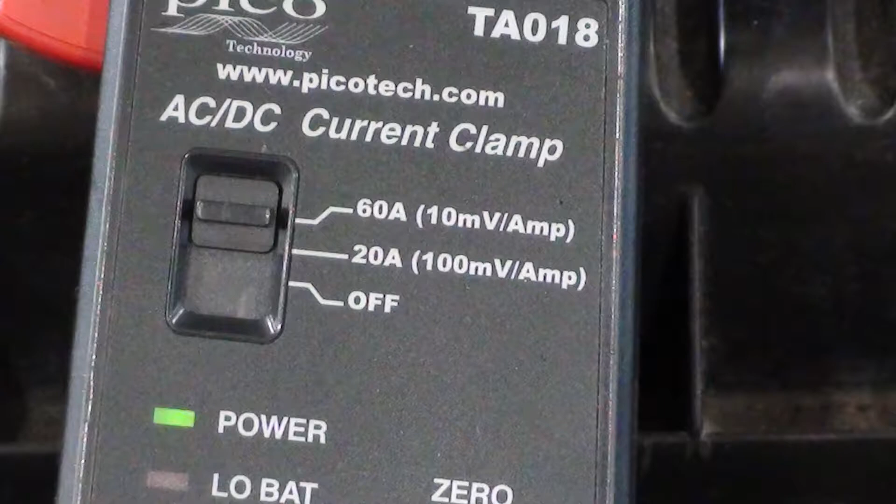Relative compression testing using the Snap-on DSO and a PicoScope DSO. Here I'm going to start with the PicoScope, where we use the amp probe to measure the current ramping of the compression stroke. We set this at the highest setting. Look at the arrow, that's the direction of the amp flow. We have to pay attention to that when we clamp it onto the battery cable.

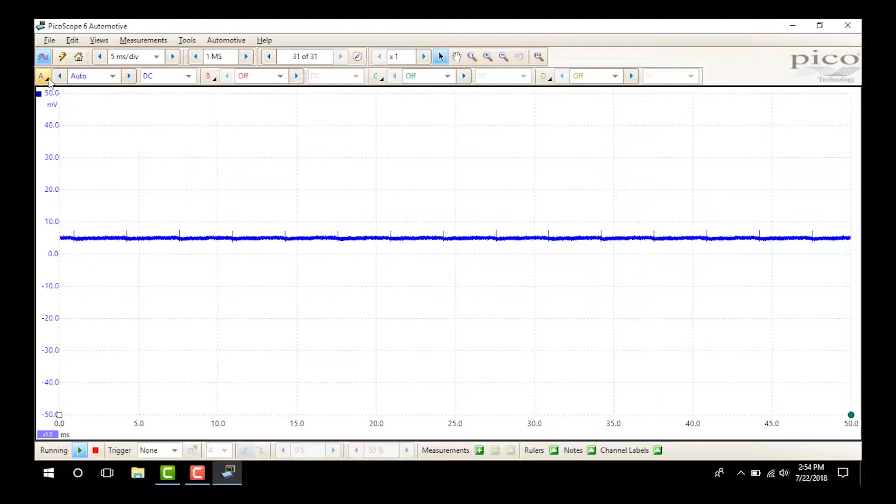Now, use a USB cable and plug it into the laptop. Then, start the Pico software. Now let's configure it. Go over to the A channel and choose the resolution setting of 14 bits. That will clean it up just a little bit.

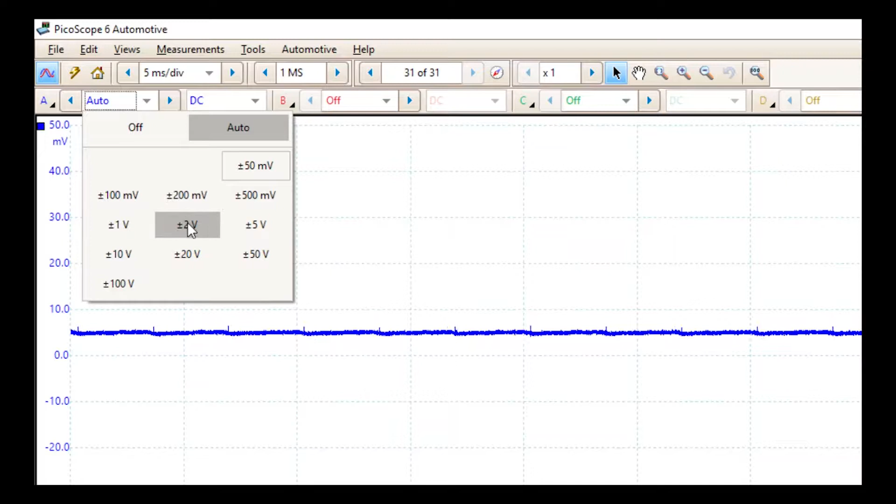Let's set our auto to 2 volts, or plus or minus 2 volts. That'll give us 200 amps on the amp probe. And set our time value at 500 milliseconds per division. Now go down to the trigger and select a single trigger. Move the trigger over to the left and set it approximately 0.2 of a volt.

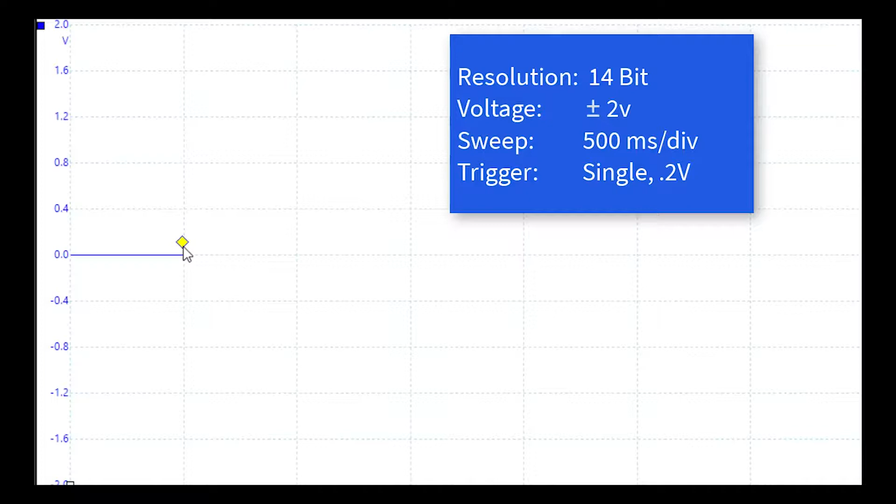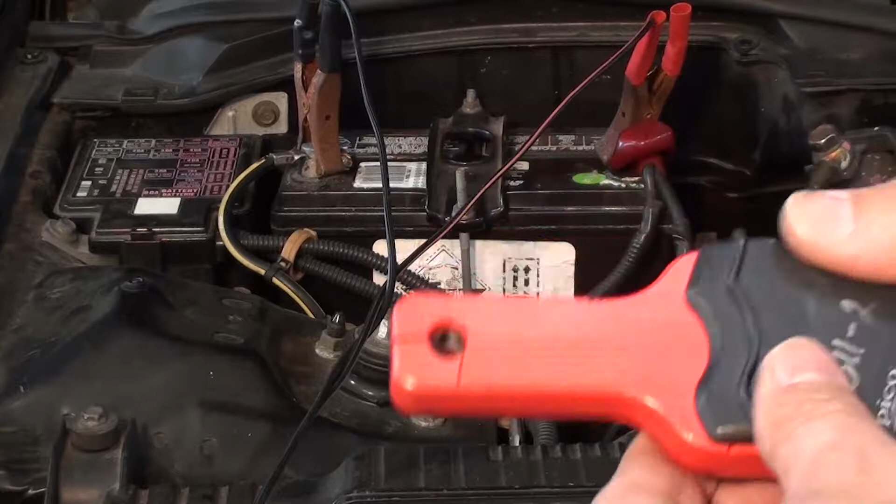Now, zero the PicoScope and place the amp probe over the battery cable. Make sure to get the arrow in the correct direction and make sure the clamp completely clamps over that cable so it's closed completely. If it's not closed, it won't work properly. Now, disable the ignition by unplugging the distributor connector.

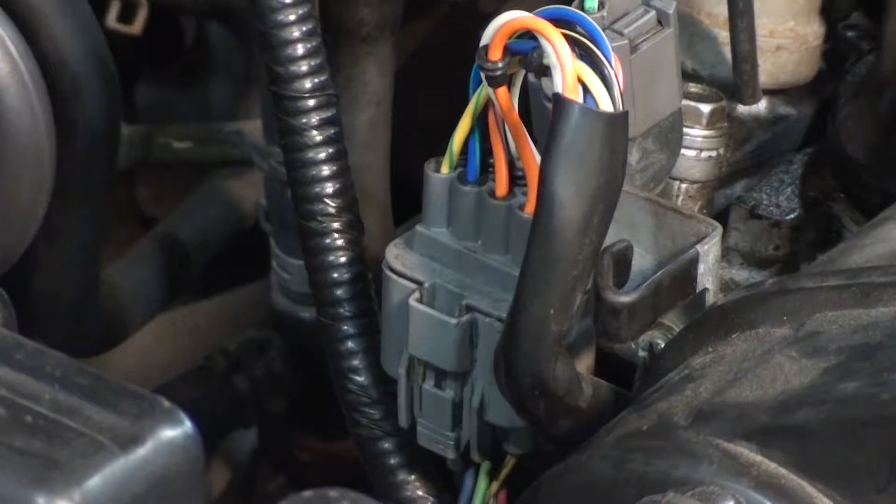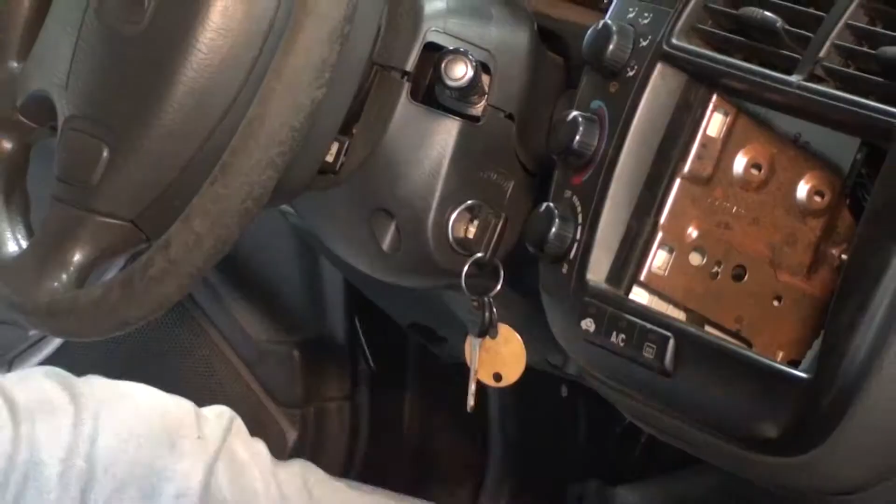And crank the engine over. Here we're looking for all even patterns. If they're even, we're good to go. If not, there's a problem. I'm now going to tighten some exhaust valves and retest to show you the results.

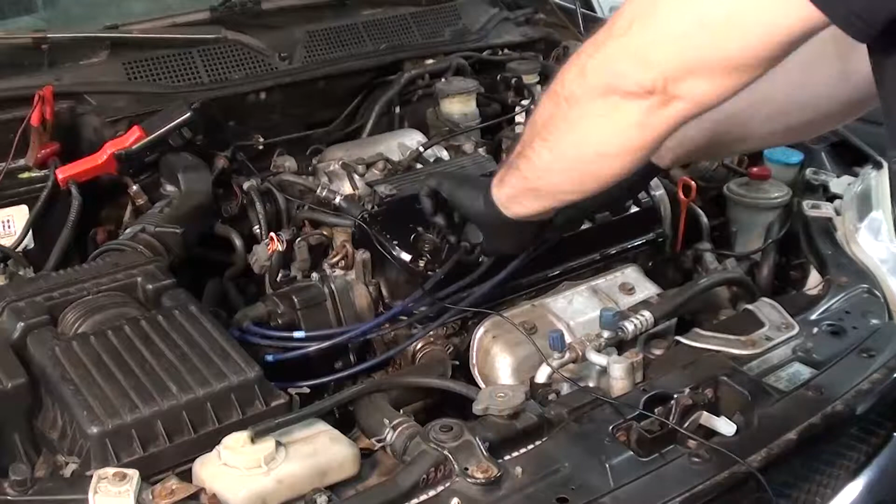I'll quickly pull the spark plug wires out and remove the valve cover. I'm going to set the cam in the correct position for cylinder number 4. Once I note that they're loose, I'm going to check the current setting. Both exhaust valves are set to 11 thousandths of an inch. That happens to be specification.

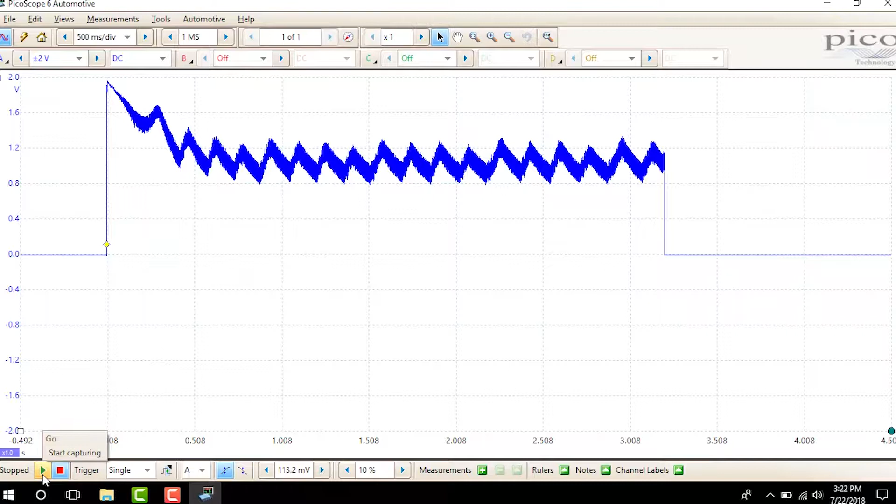Now, I'm going to arbitrarily tighten both valves a little bit. Here you'll see I cannot even get a 2 thousandths of an inch feeler gauge in there. And let's test again. We will now see that the scope pattern is no longer even. This is because 2 of the exhaust valves are too tight.

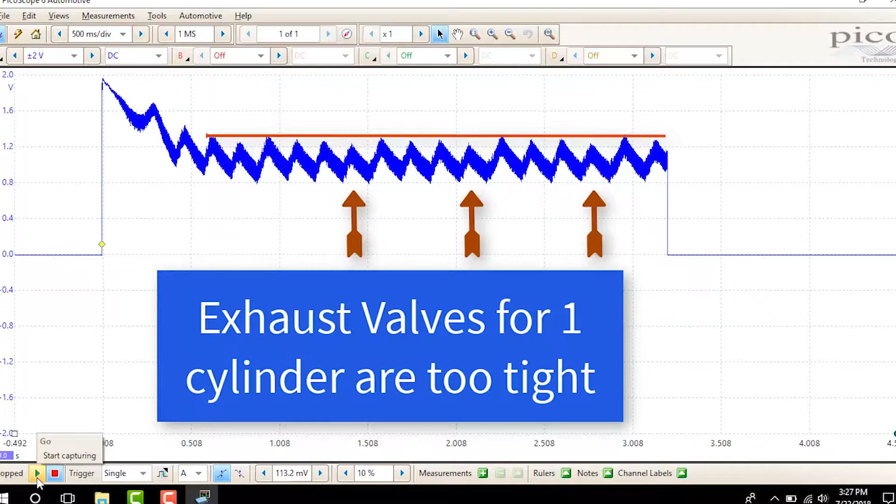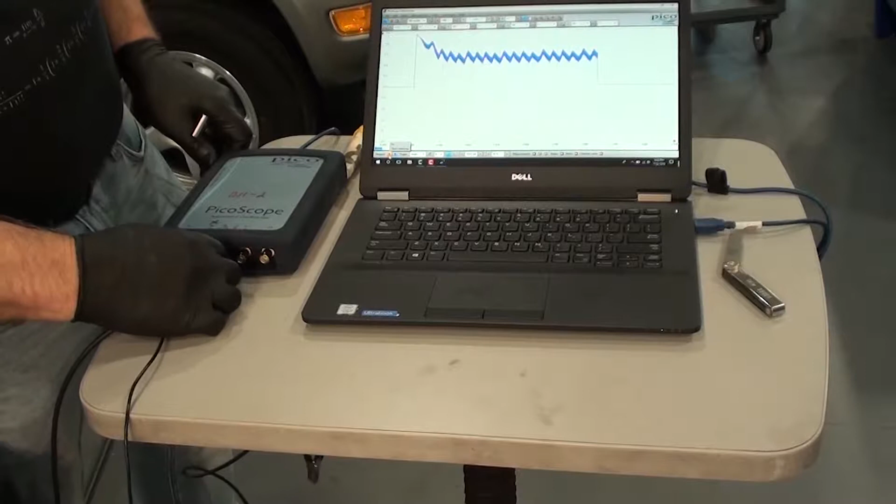Which exhaust valves are they? Well, you know because you saw me do it. However, if you don't know in the car, we're going to have to sync it up with the number 1 cylinder. We're going to use a secondary ignition probe connected to the second channel of the PicoScope. Clamp it on cylinder number 1 spark plug wire and ground it.

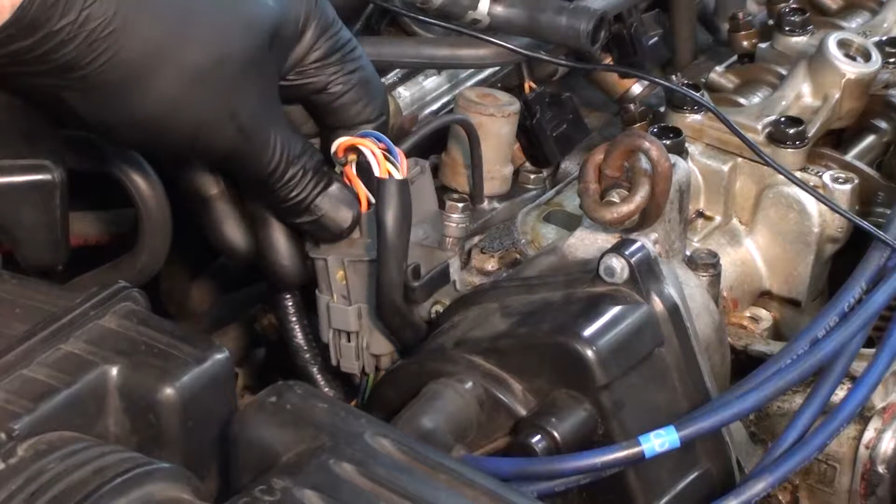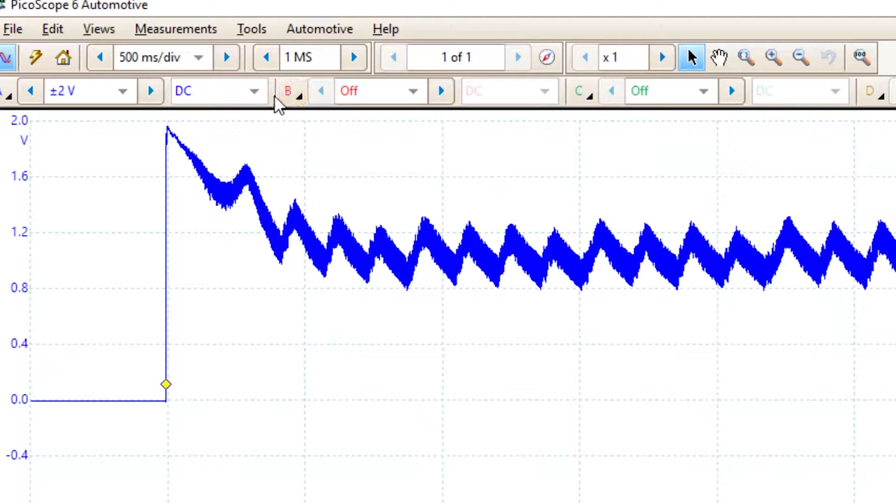Now, we have to reconnect the ignition so we get a pattern. However, we have to disconnect the injectors so that the car won't start. Let's go ahead and set up the probe. Click the B channel and click the down arrow to change the probe. Scroll down and from the list, we want to choose Secondary Ignition Probe Inverted. Now, change the voltage scale to -5 and plus 50 kV.

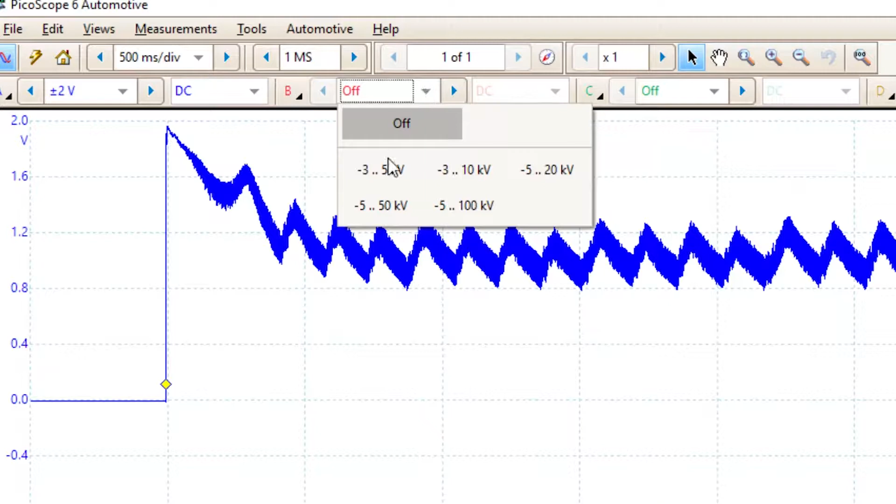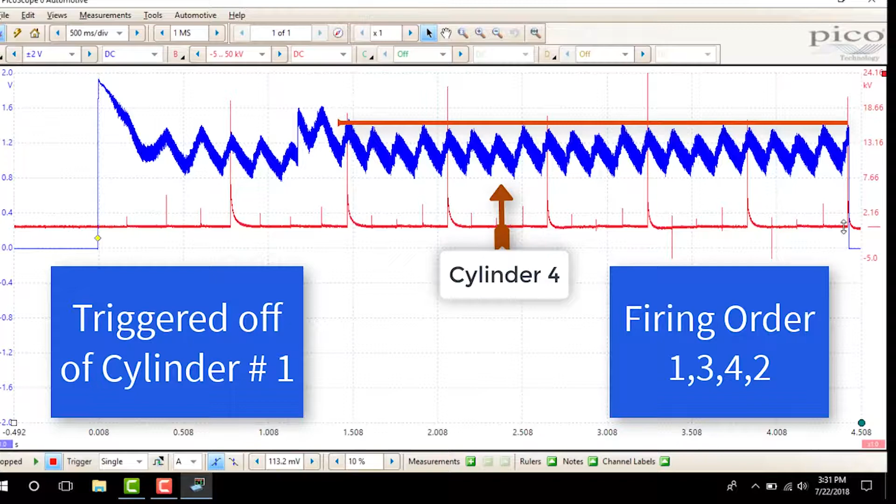Now start the recording, and let's crank it again. Once we get both patterns, we can move the ignition pattern up so it syncs up with my amp pattern. If we know the firing order is 1, 3, 4, 2, we can now figure out which cylinder is lower than the other cylinders. Happens to be cylinder number 4, which matches up with what I did. I'm going to do a quick save so I can remember this pattern.

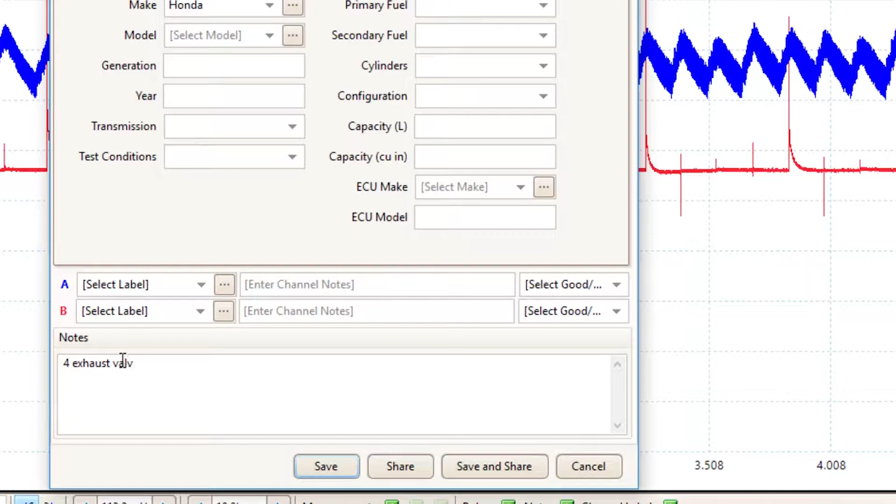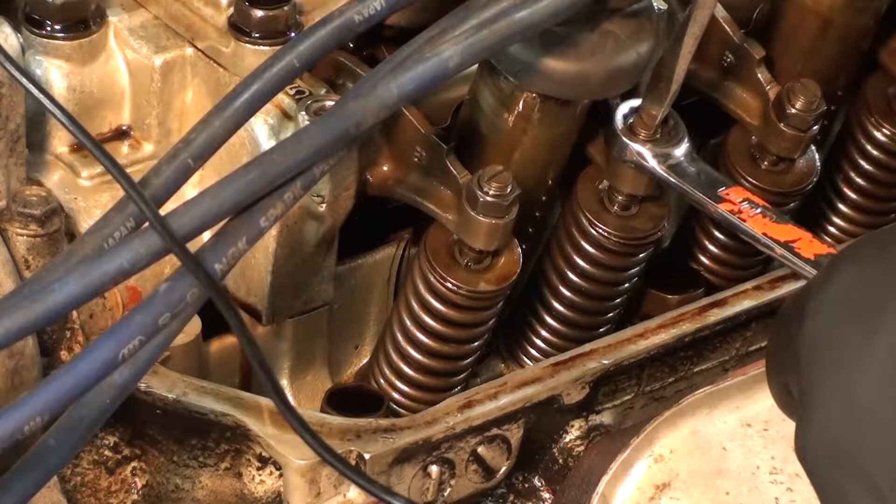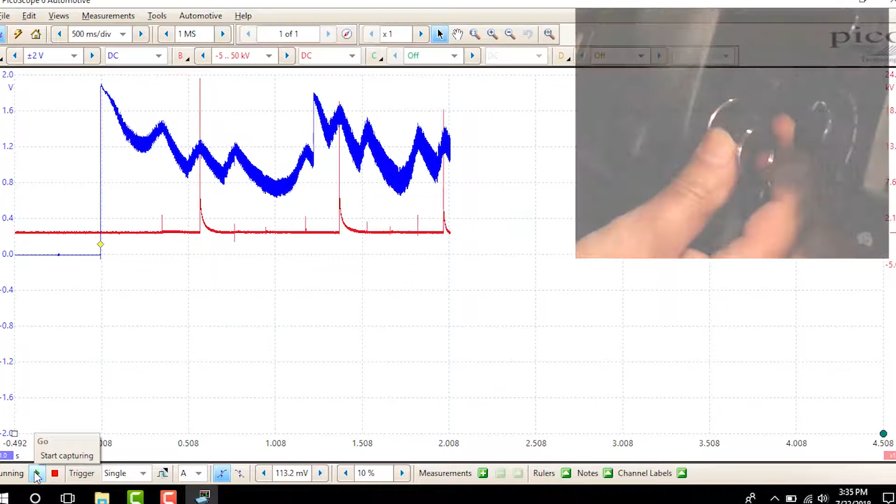Let's do another test. Let's arbitrarily really tighten these valves up a lot. Now let's crank the engine over again. Now we can really see how bad that number 4 cylinder is. It totally drops out on us. So let's set the valves back to 11 thousandths of an inch.

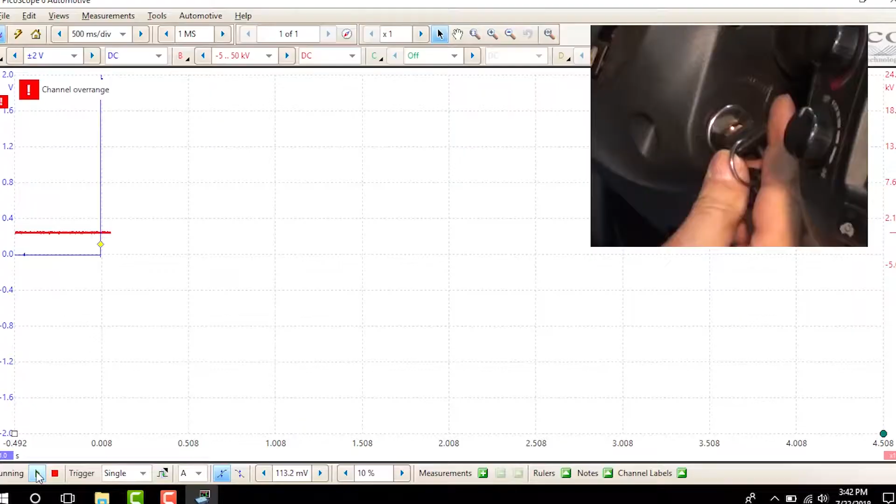I'm going to do the test one more time. Crank the engine over. Only this time I removed one of the spark plugs. Here we can see I removed spark plug number 2.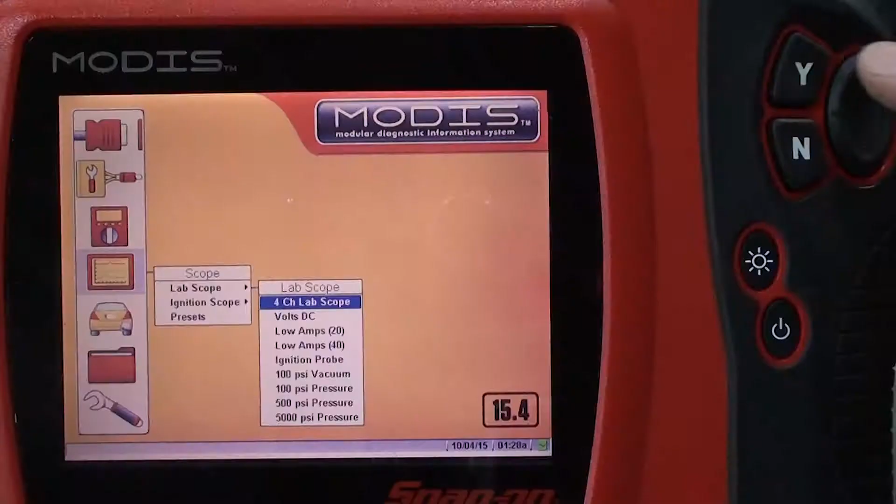Relative compression testing using your Snap-on scope. Here I'm using a Modis, but most Snap-on scopes are very similar. After turning it on, we navigate to the menu. We use the down arrow to choose the scope function. Then choose Lab Scope, and now choose 4-channel Lab Scope. If you have a scope with only 2 channels, that's what you would choose.

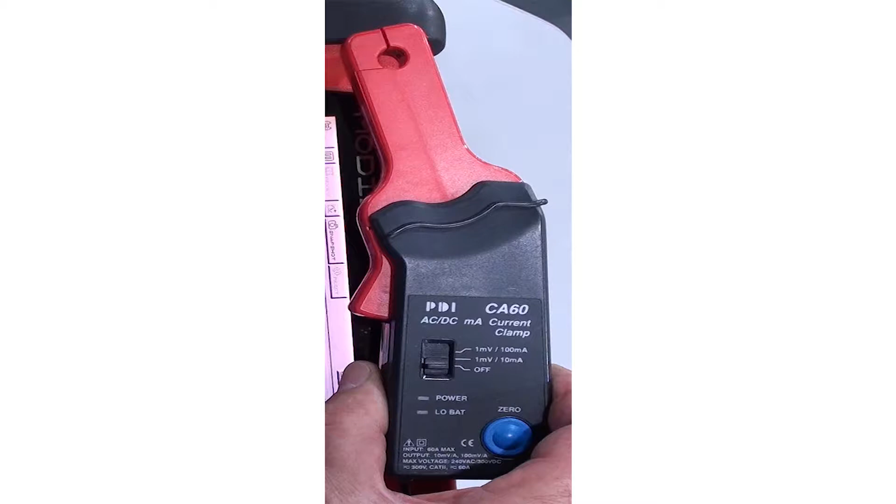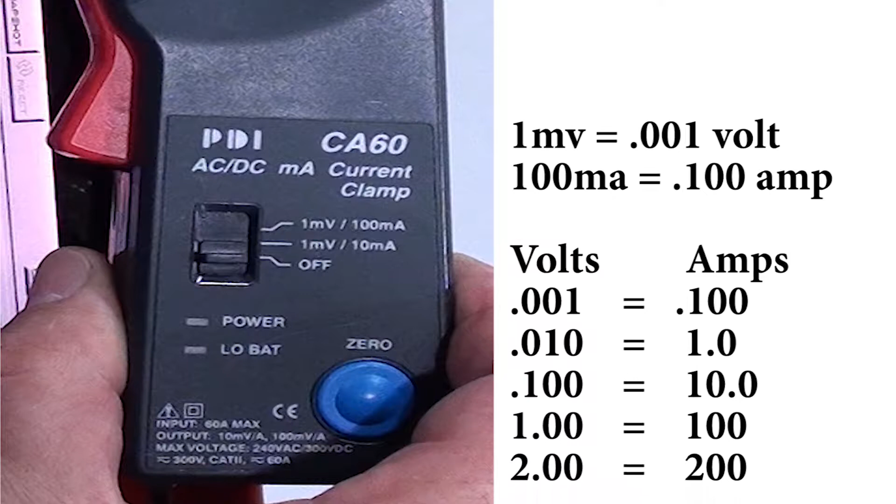Now we're going to use an amp probe, and we're going to connect it to channel number 1. Put the red lead into channel number 1 and the black lead into the ground lead. 1 millivolt equals 1/1000th of a volt. 100 milliamps equals 1/10 of an amp. Since the starter motor draws between 100 amps and 200 amps, the voltage scale on the scope needs to be set to 2 volts.

Now we will use the arrow button to the right and navigate over to the channel setting. Once you're at the channel setting, press the Y to open it. Go up to channel number 1 and set it to displayed and filtered. Turn both of these options on with a check mark, then use your left arrow and your N button to back out of this setting. Now navigate over to your test leads. Go down to the test lead mode and select test lead, even though we have an amp probe.

Now over to the voltage setting. We want 2 volts. 2 volts will give us the ability to measure 200 amps for the starter draw. Now navigate over to the time setting. Set our time sweep to 200 milliseconds. That's the entire screen, not per division. Press the Y button. Finally, we're going to set the trigger to automatic. Go up to channel 1 and make sure there's a check mark next to where it says auto.

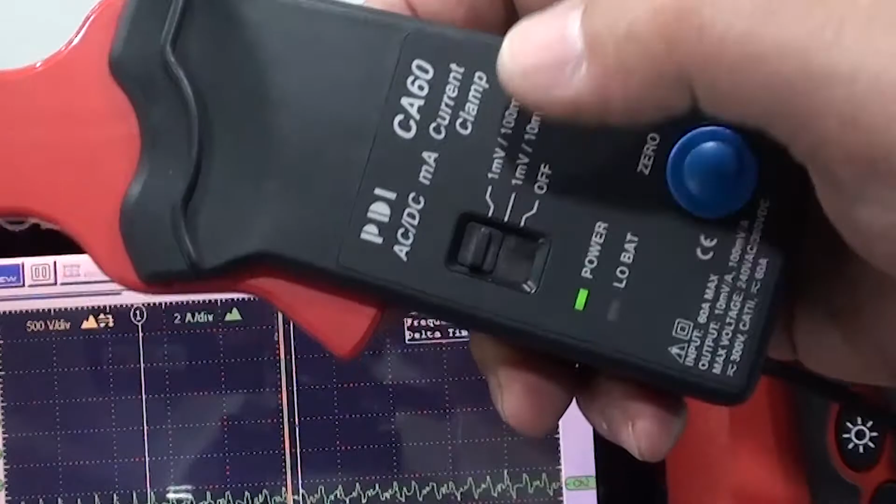Finally, use the navigation to navigate over to the start, stop, or the pause play button. When you get there, press Y to pause it. Turn your amp probe onto the highest setting, then press the 0 button. Now check the arrow to make sure the amperage flow is in the right direction. The arrow needs to face your starter motor. Clamp it on your positive battery cable. Now disconnect your injector so the car won't start.

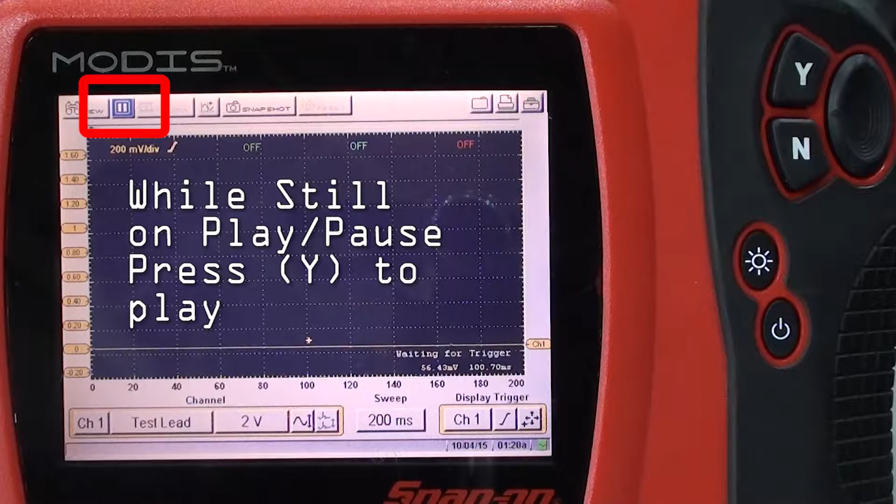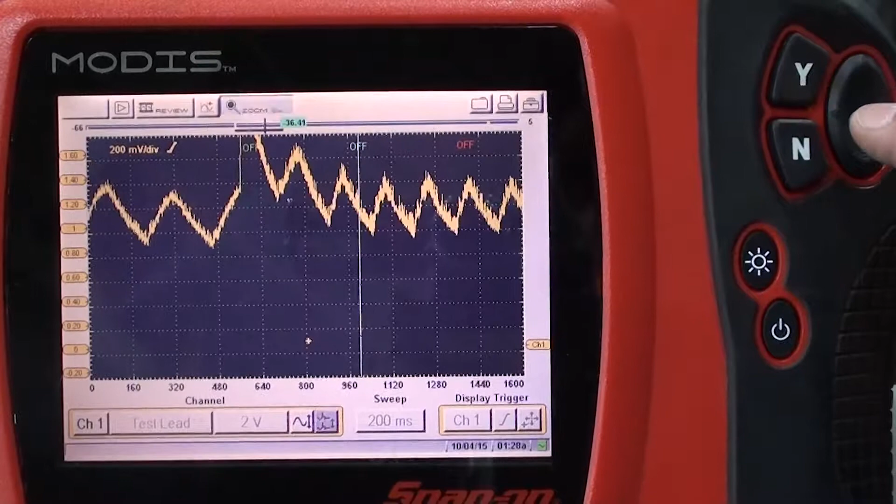Press the Y button to start the play option and crank the motor over. When it's done, press the Y button again to stop the play. Now navigate right to the zoom and choose the 8x zoom. Use your arrow buttons to navigate to view your screen. You can now see the humps from the amperage flow.

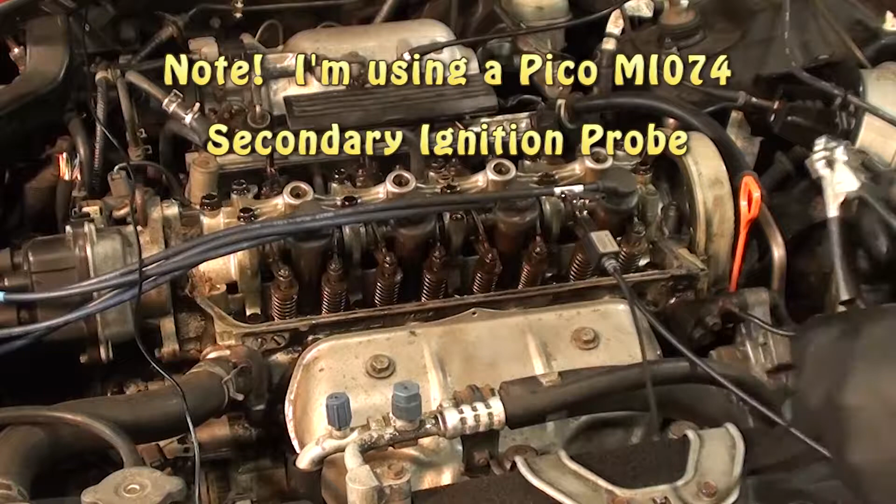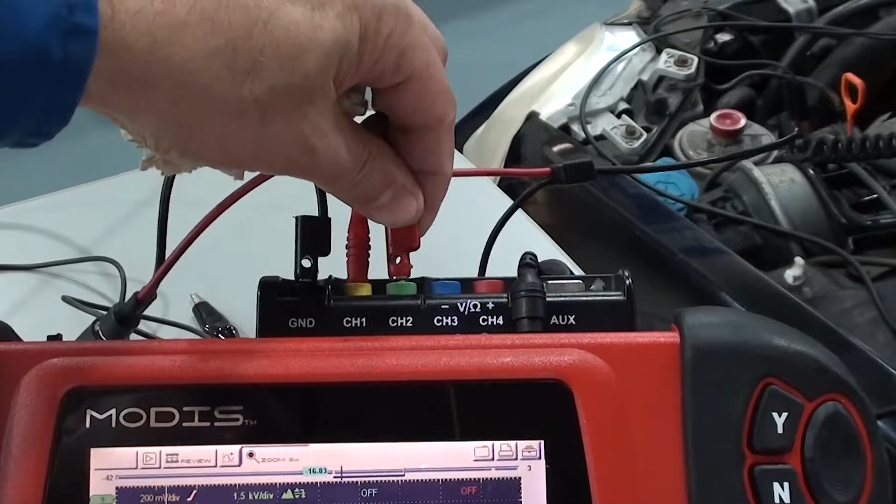Now let's sync cylinder number 1 secondary ignition to identify each compression stroke. Place a high intensity clamp over number 1 spark plug wire and ground it. Now I'm going to use an adapter to go from the BNC connector on my probe to my scope, which uses a banana jack. Disconnect the ground and put the adapter ground into the scope. Place the red lead into channel 2. Now I'm going to use a jumper wire to reconnect the ground for the amp clamp.

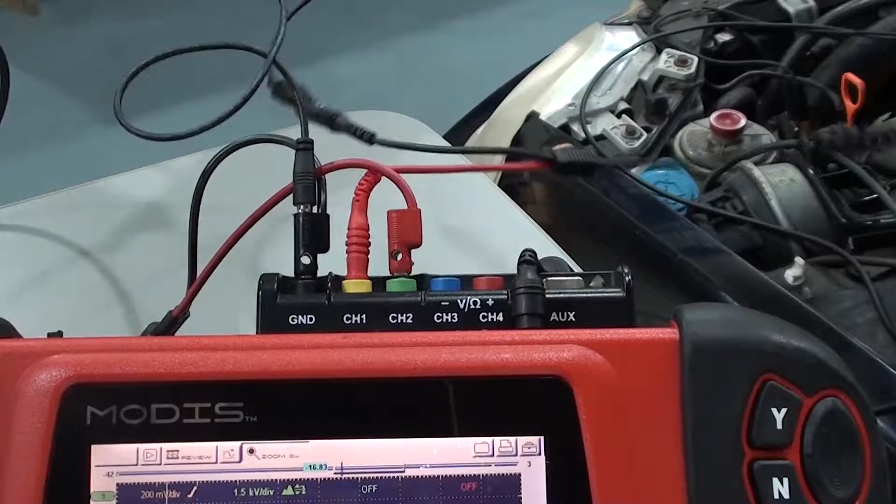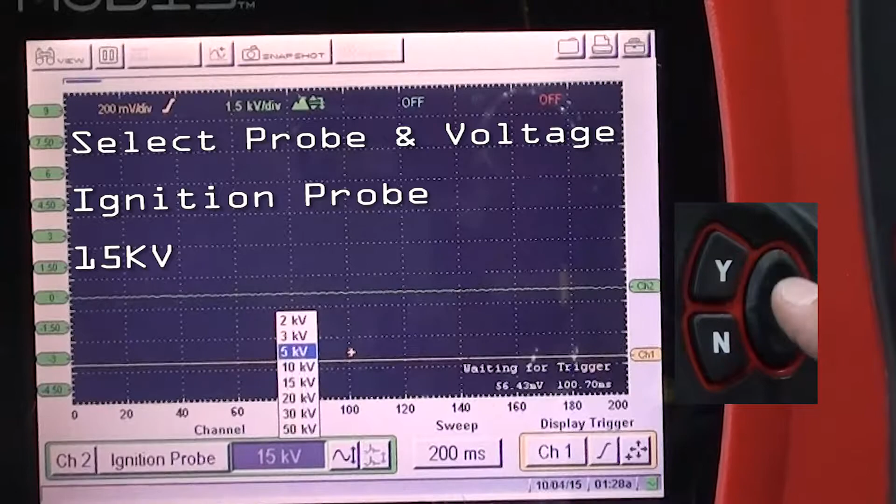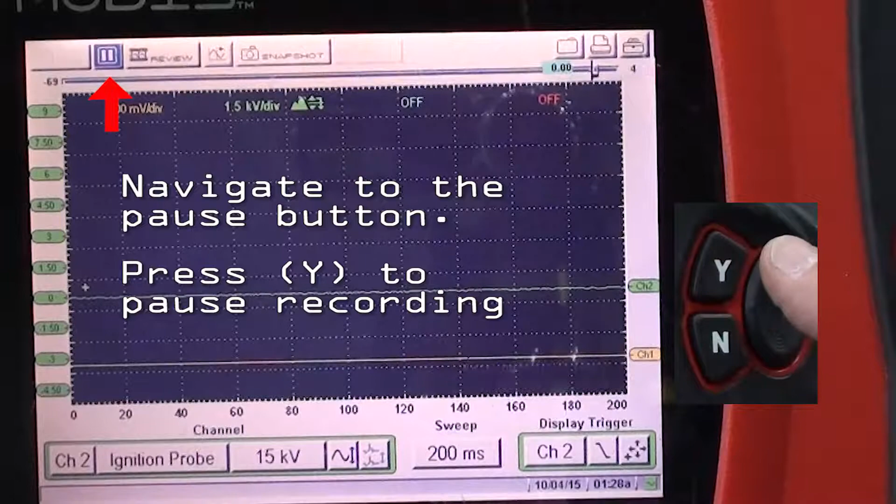Now press the Y button and let's configure channel 2. Go over and make sure display is on, inverted and peak detection. Go over to the test lead and choose ignition probe. And now select 15 kV for your voltage. Leave your sweep alone, but go to channel 2 trigger and make sure it's set to auto. Navigate to the pause button and press Y. When you're ready to crank the engine over, press the Y button again to record. Now crank the engine over.

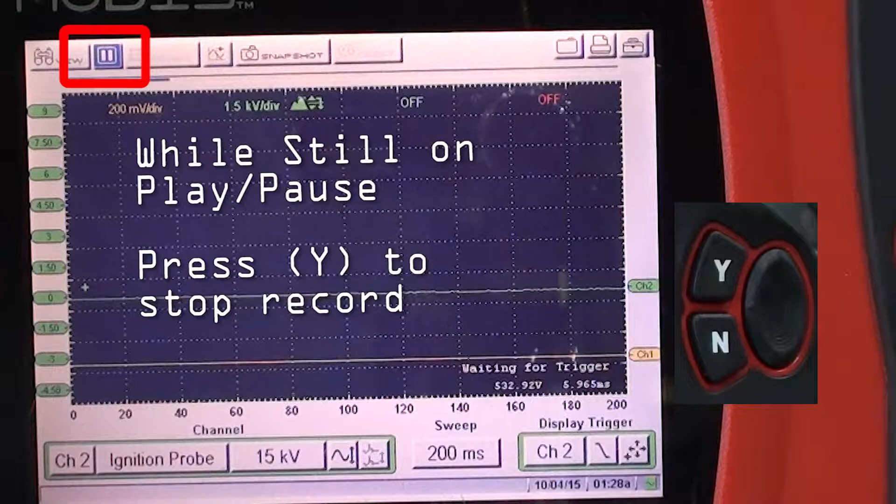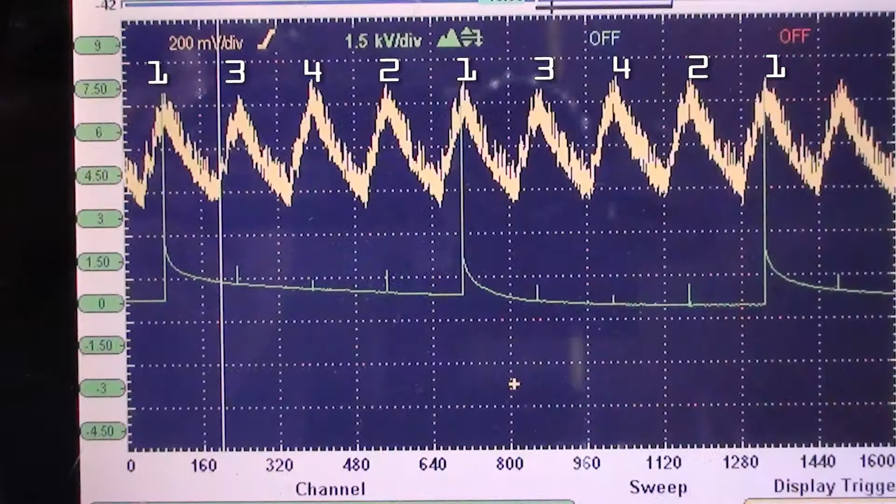When finished, press the Y to stop the recording. Go back over to the zoom, choose the 8x mode, and navigate over to your pattern. You'll now be able to see where it syncs up with your ignition pattern, and you can identify which cylinder may have a problem. If you have a coil-on-plug system, you'll need to consult the wiring diagram to locate the ignition trigger wire point.

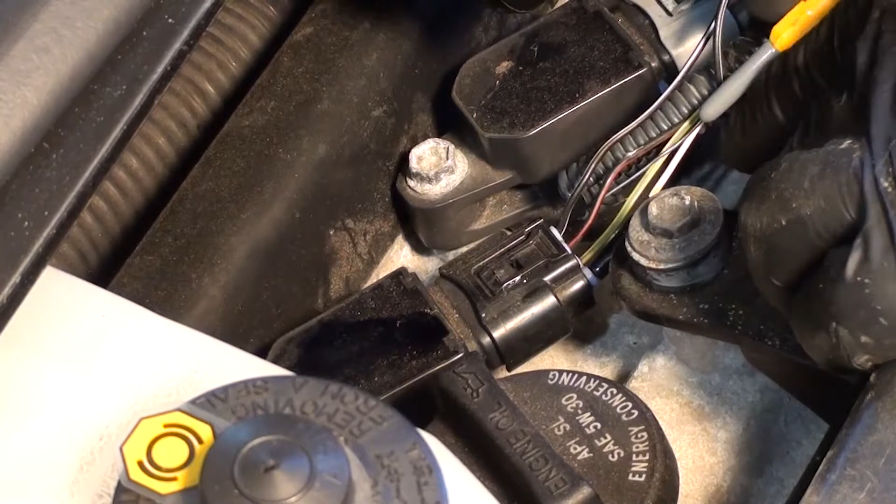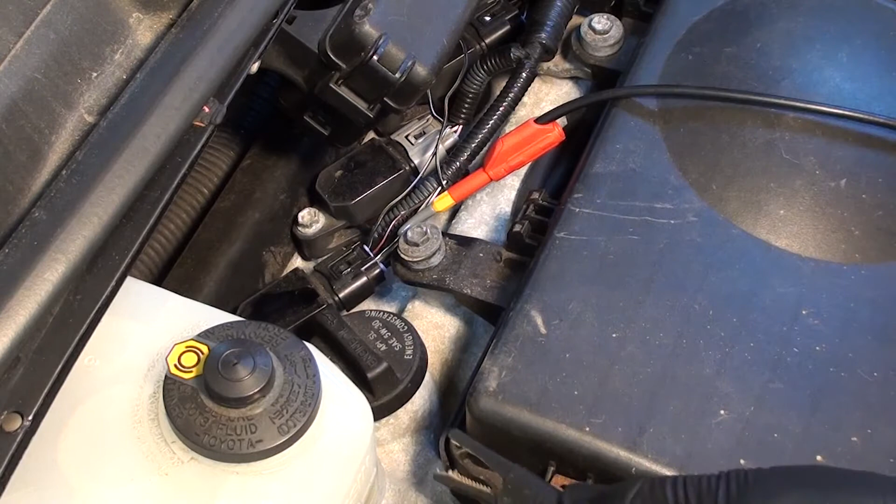Then, use a back probe pin to back probe that wire on the coil. This is your primary ignition signal. Now connect your test lead for your scope and the ground lead for the scope. Now connect the BNC connector to your PicoScope channel or one of the channels on your Snap-on scope.